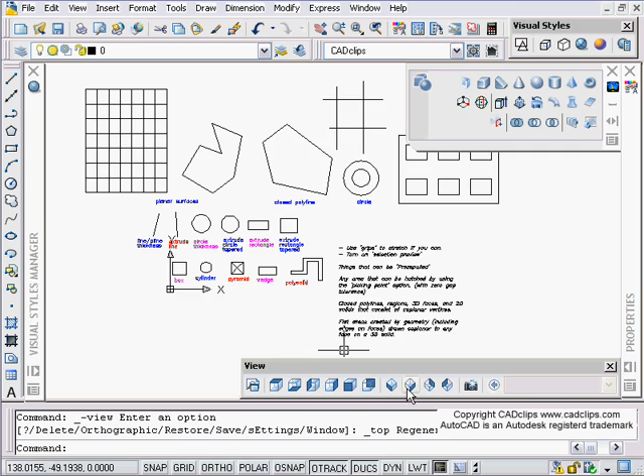I'm going to go to a diagonal isometric view. I've got some basic primitive shapes in here that I've used these tools to create. From my previous lesson, I've extruded a rectangle and extruded another rectangle, and I should have tapered that. You can taper that circle, given a thickness, and just some samples of when we go to use our press pull. Don't get it mixed up with extrude - similar but not quite the same, the press pull tool.

And we've got a new object here, some planar surfaces that we're going to create, and this is a polyline that we're going to turn into a planar surface.

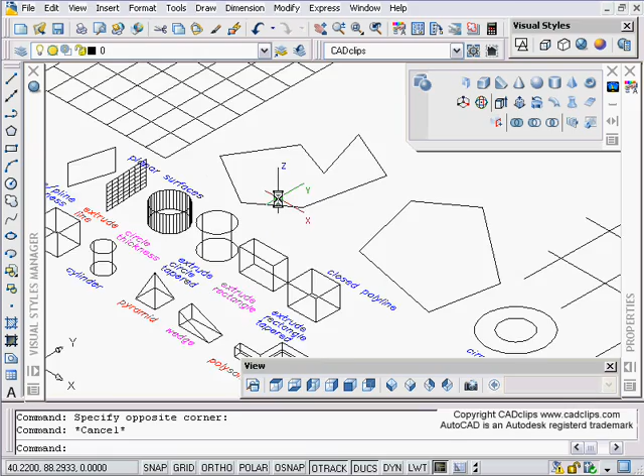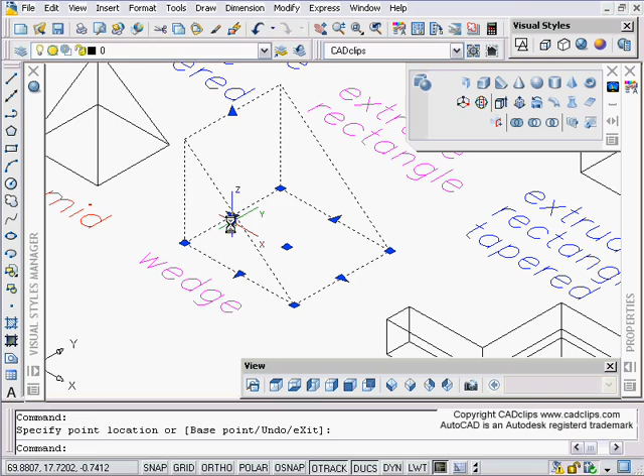So I'm just going to take a look at my notes here. First of all, use grips to stretch if you can. What I'm talking about here is we have some primitive objects over here. As long as we don't press pull them or extrude them, we can use our grips to stretch the shapes of these quite easily in 2D or 3D. So I can go back while this is still a wedge, and I can click on here and do all kinds of neat stuff with whatever is available with that particular primitive object.

Okay, or even something that's been extruded - this has been extruded. Grip on here and you can stretch this stuff around. We have different shapes, we have a polysolid, and we can do different things with a polysolid.

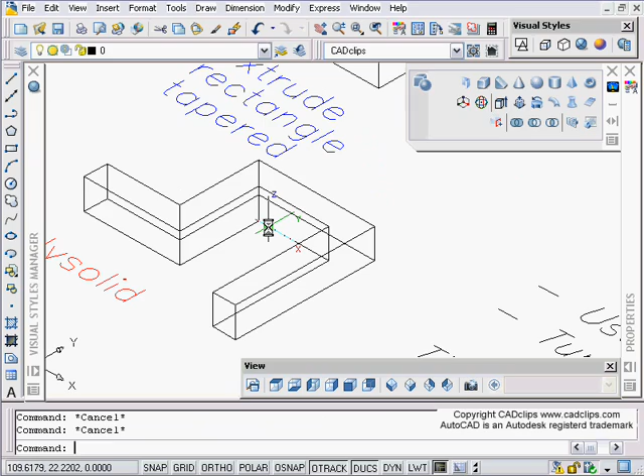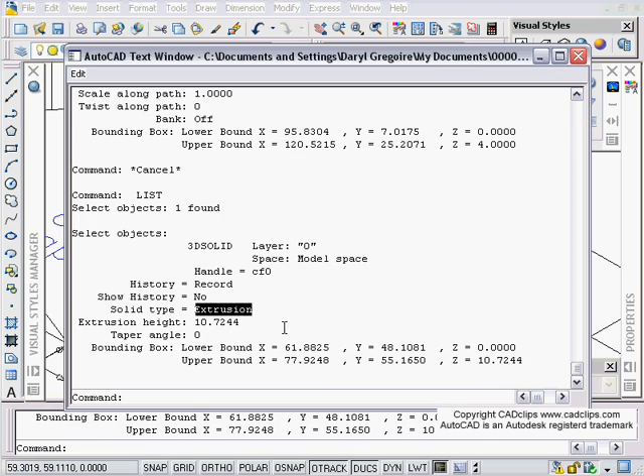Once we go in and use our press pull, you'll notice that if I list this, it lists as a 3D solid. If I list this, it's a 3D solid, and it's called a wedge. We saw this in the previous one - 3D solid, and it's a sweep. Just take note of that. If I list this, it's a 3D solid and it's just an extrusion. We're going to see something else in a minute. Again, we list this, it's a pyramid, and it is a 3D solid.

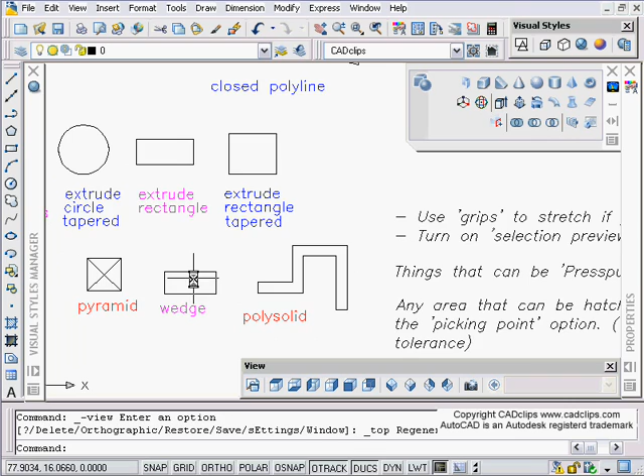So now when we go to do our press pull, first thing is use the grips as indicated, as much as you can before you go in and start press pulling, because once you press pull, you'll lose the control and the grips of that primitive object.

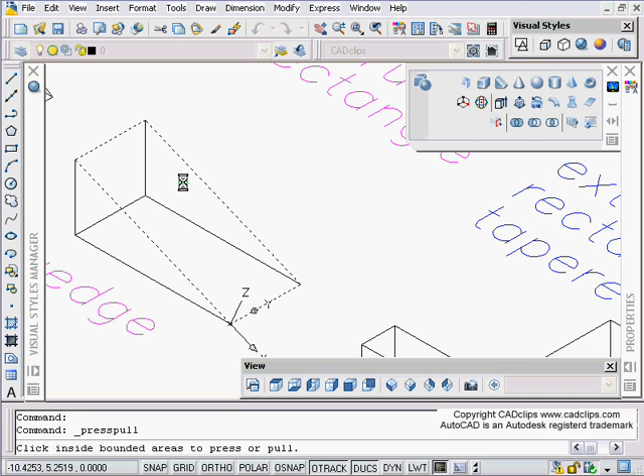Turn on selection preview when you're doing your press pull. So when you do your press pull, you'll notice that if you go inside here and start your command, you're going to hover over these edges. If you don't have selection preview turned on in your options under selection, then these edges won't preview, and sometimes you might have to swivel around with the shift middle mouse button to get that other side.

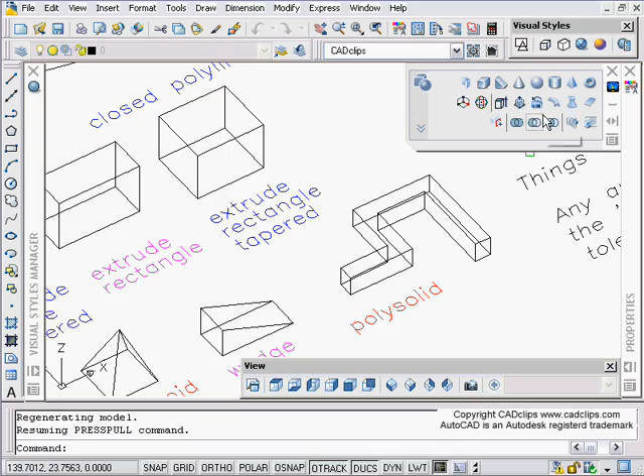If you can't get the side you want, shift middle mouse button will let you swivel around and grab the sides you want. I'm still in the middle of my press pull command - I started the command, and then shift middle mouse button allows me to transparently move around my object and zoom in and out with the wheel while still remaining in that command.

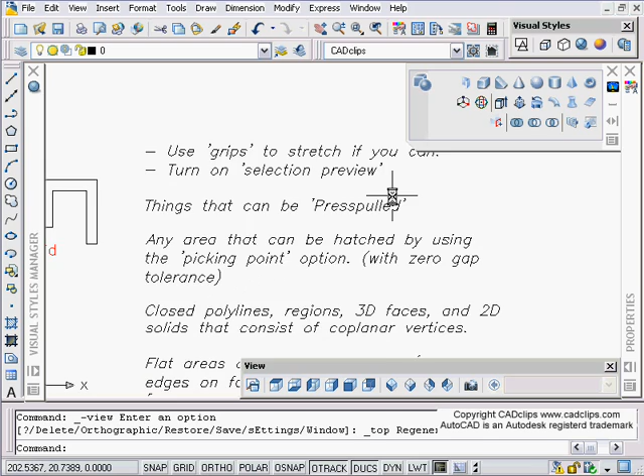So that's just a couple of notes before we get started. Turn on selection preview in your options. Things that can be press pulled - faces and stuff. Any area or flat area, it has to be a flat area that can be hatched by using the pick point option with the 0 gap tolerance, can be press pulled.

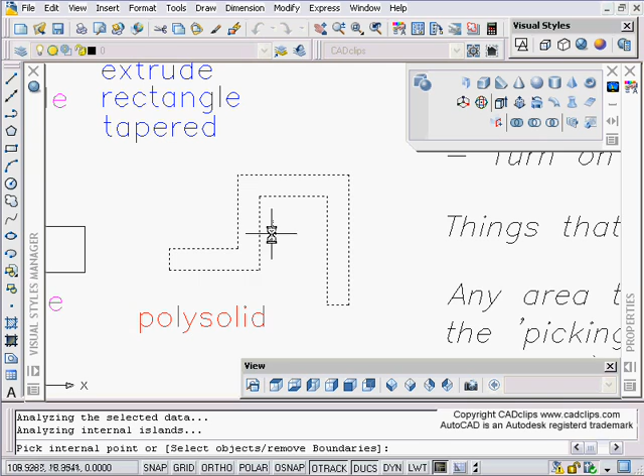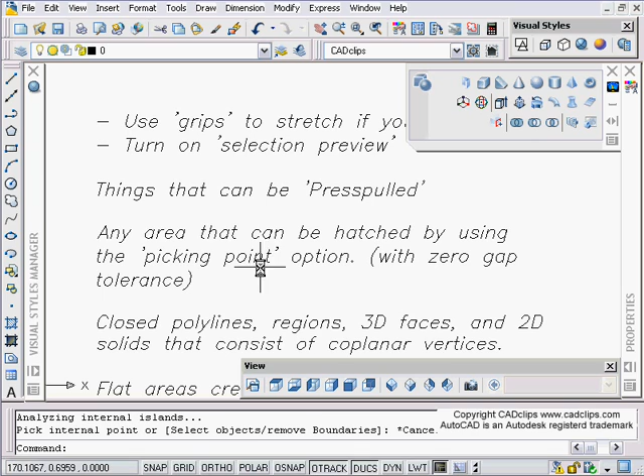So if you can hatch it using the pick point option - when you go in and hatch, I can type in add pick point, and if I can pick a point and it recognizes that, then these can be press pulled. So one of the similarities is if you can hatch it using the pick point option logic, then you can also press pull it.

The other thing you can press pull are just closed polylines. We've got some objects over here, some polylines and circles and stuff, and just basic rectangles. You can also press pull those.

But it has to be a closed polyline, which is if we do our rectangle command, that is a closed polygon. Circles can also be press pulled, more or less like an extrusion.

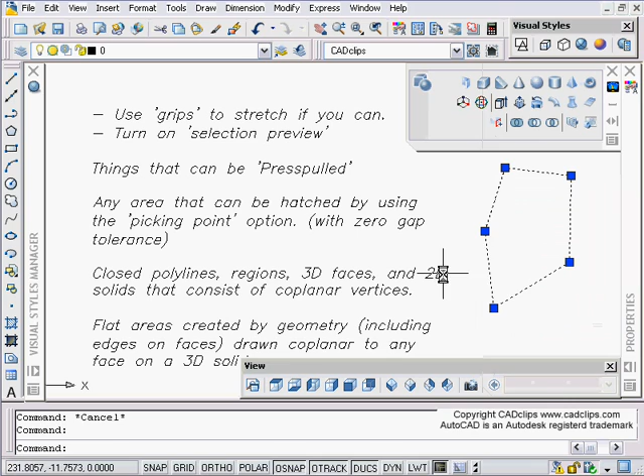If you have a polyline that's not closed, if you work your way around instead of saying close, you just pick the endpoint and hit escape, that is not a closed polyline. You have to click on that, go to the properties, and go down to where it says closed, and say yes. Now it's a closed polygon, and you can go in and press pull that object up to where you want.

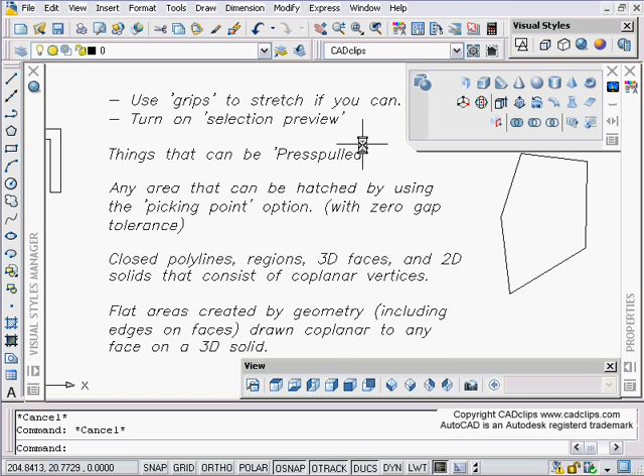We'll see that closed polylines, regions, 3D faces, 2D solids that consist of coplanar vertices - all things that can be press pulled. We're talking about things that can be press pulled: flat areas created by regular 2D geometry like lines, arcs, and circles, or geometry that's drawn on the edge of a 3D solid. We're going to see all of that right here.

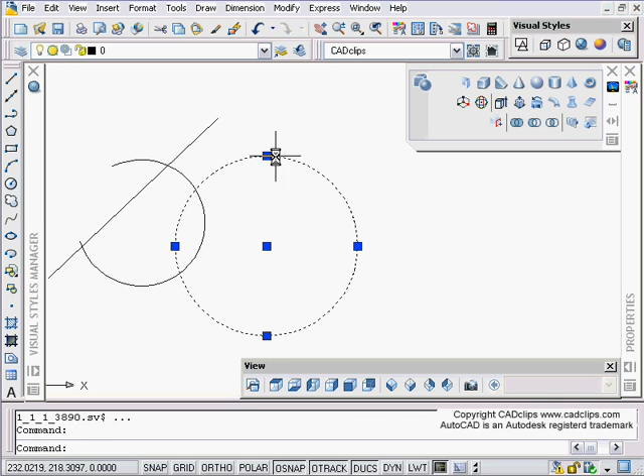Let's just start up here. We can also use a block too. Over here I've just got a circle, got an arc, and I've got a line. I'm going to go look at that in my 3D view, maybe change over to be my cool conceptual view here. Now I'm going to use my press pull, and I'm going to hover over that middle part, and I can press pull that up.

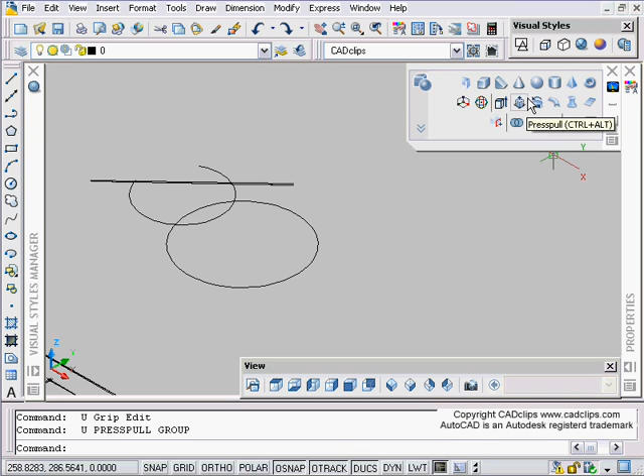Once I do it, I click on it. I can click my grips, I can move it around, have a look. I'm going to undo that back. Then I can say press pull - maybe I'm going to press pull this part up, or maybe only this part up.

Shift middle mouse button. Same thing over here, I've just got some rectangles, that's all these are, rectangles. I can say press pull, and I can hover over here, press pull that up. Is that cool or what? Could have used this a long time ago.

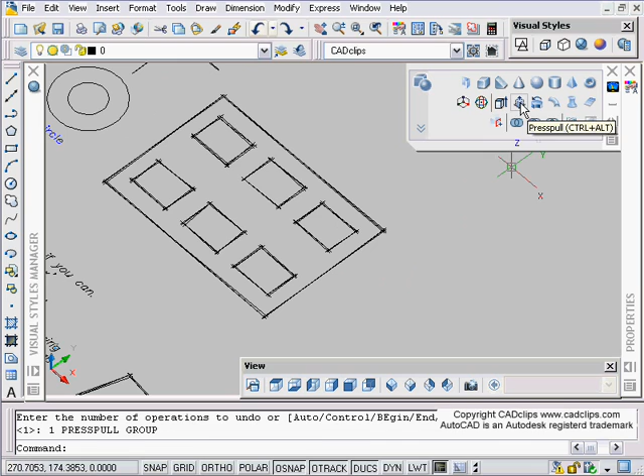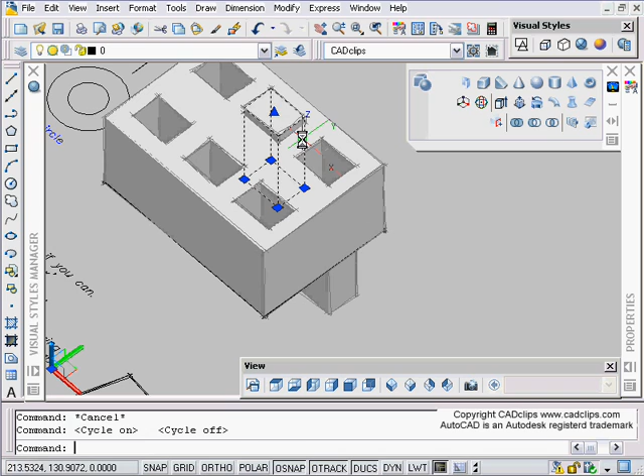Or I can say press pull this guy up, or press pull this guy down. I can still go back, press pull, grab all of these, bring them up, and then I can grab that one guy that was in here.

Shift space middle mouse to toggle through, grab my grips, pull that one up - all starting from just regular polylines. Shift middle mouse button, hover over here. We've got a couple of circles. Press pull, grab the middle one, press pull, grab the outer one. That's just using regular 2D line geometry.

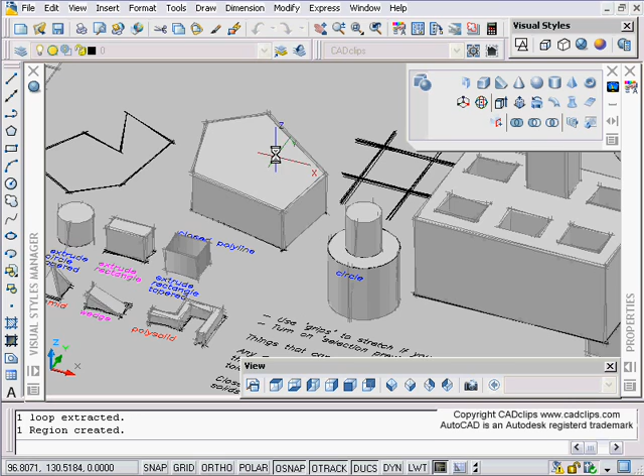Over here I've got a closed polyline. Press pull, click on here, bring it up. Now that I have that, I can say line - I can draw a line, and I have to make sure I snap to those endpoints because it has to be on that surface, which is where our dynamic UCS comes in very handy. Now I can press pull that up.

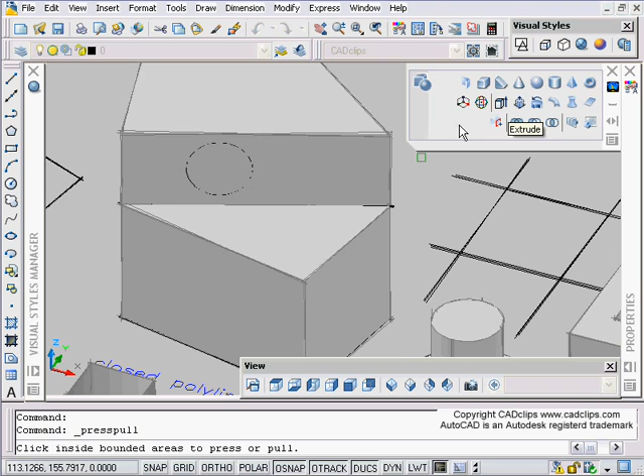Using my dynamic UCS, I can hover over here and draw a circle on here, then I can press pull, grab that, pull that out. Now I can draw another circle on maybe here - am I pushing it too far? Press pull, grab that little guy, push it in, just like that. Shift middle mouse button.

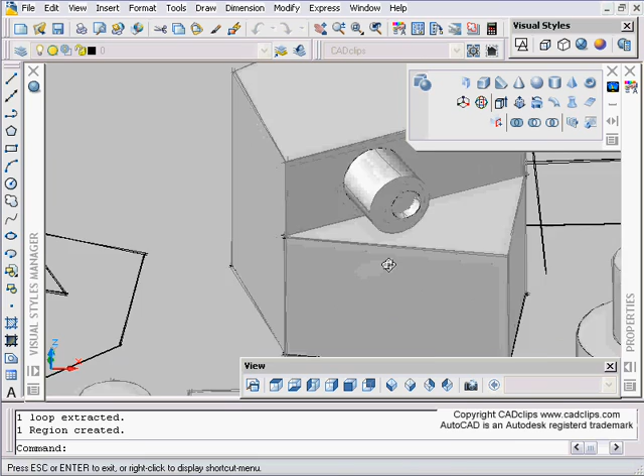Anytime you want to go ahead, you can start to draw a line on a surface - regular line, but it has to be on the surface. Now that one I don't think went on the surface. Let's just move along here.

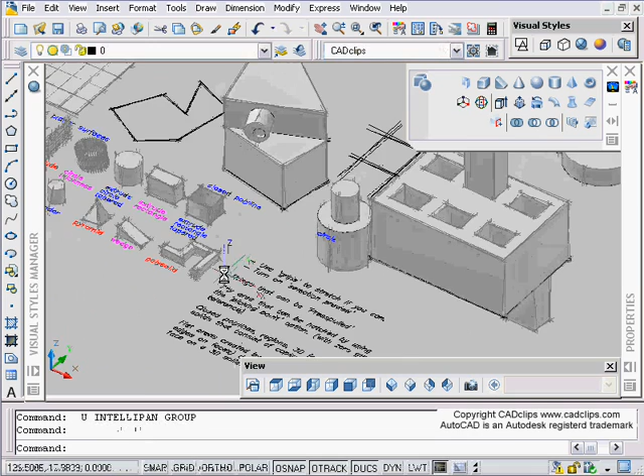Here we've got a polysolid, no problem, go in, push, pull, hover over it, do what we want. We've got a wedge over here. Maybe we're going to draw a line, making sure we hover over this to get our dynamic UCS working.

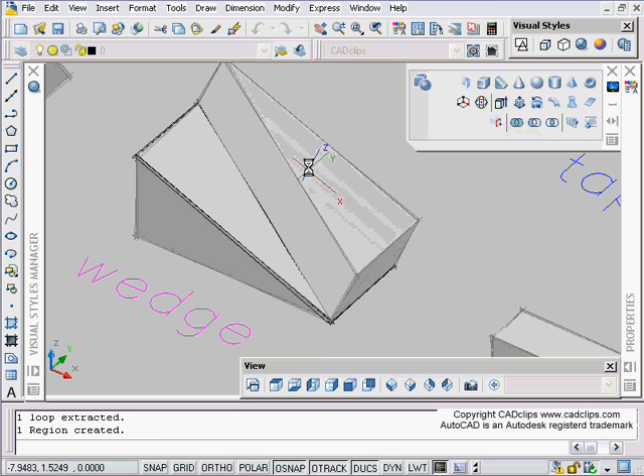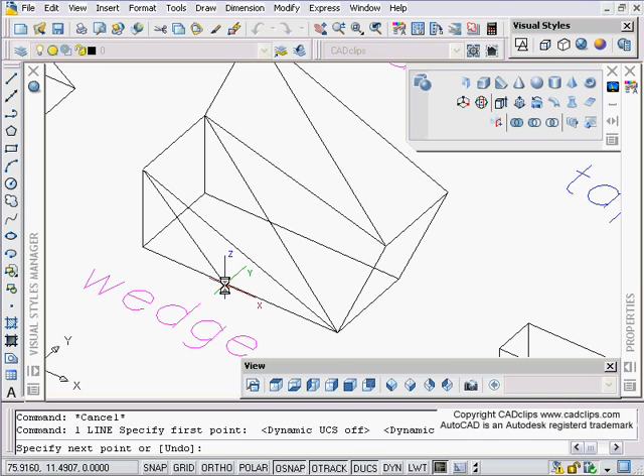Now I can press pull, grab that surface, bring it up. Draw another line from there, notice the surface is hovering. When I go to draw that line, I type L. Notice that I'm picking the surface because my DUCS, my dynamic UCS is off, I can't draw on that surface. If it is on, I can draw on that surface, and then I pick there to maybe that midpoint.

Press, pull, click on this little guy, bring it out. It's really endless, the degree to which you can play with this stuff. Draw on any surface and press, pull the object up. Cylinder, same thing, as a cylinder it's fine.

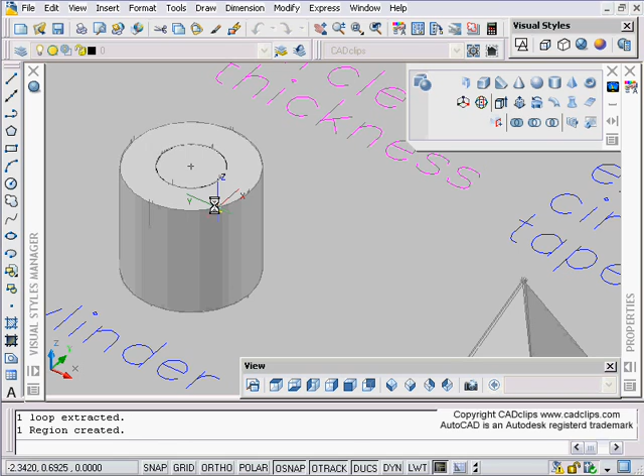If you want to poke a hole in there, maybe we'll go in and draw a circle, then hover over here to get that surface, draw our circle, click on there, do a press pull, click in that little middle guy, take my snap off with my F3, drag down, shift middle mouse, I've added that in there. Unlimited as to how you're going to do that.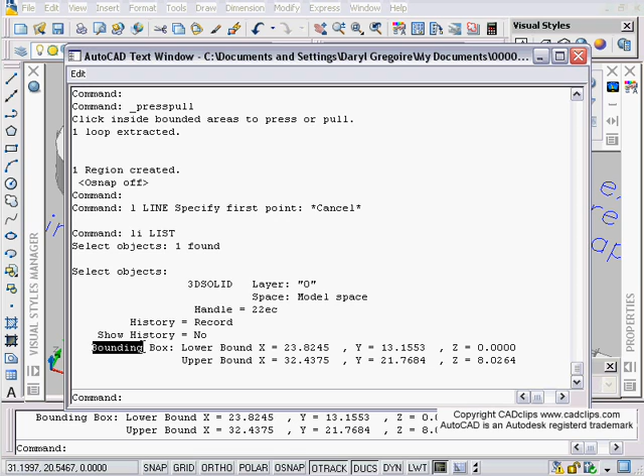Now the difference is if I list this now, it's a 3D solid and it has no, it just says bounding box, it doesn't say it's a cylinder anymore. This still lists as a pyramid, see solid type, but if I scroll back, this one, the previous one, doesn't show that information because it's a hybrid type object.

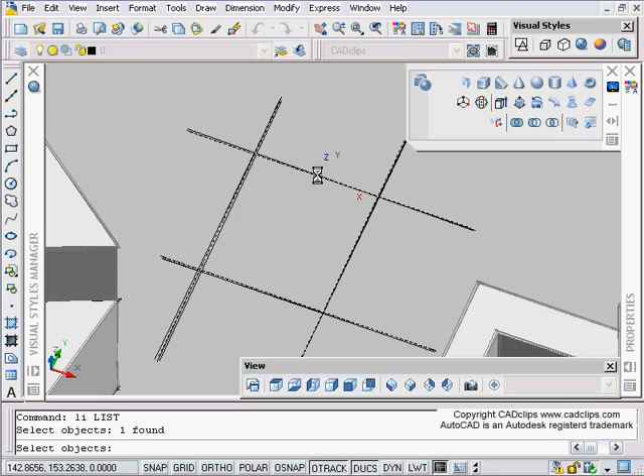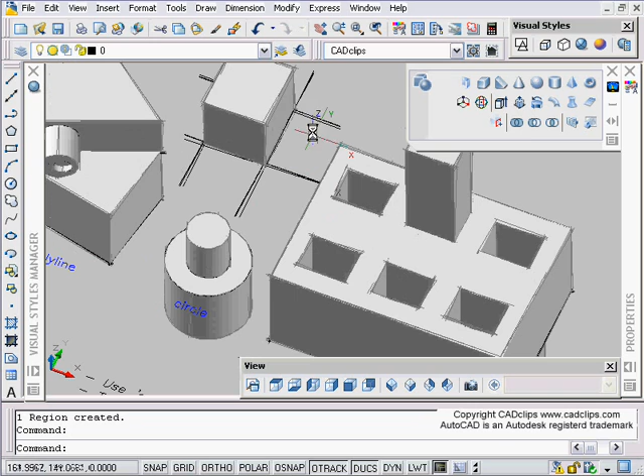Now this is a block. If I list this, this is a block, and the block name is just block 1, and it's made of lines, but guess what? Press pull, I can hover over that, and grab that. So even 2D geometry that is part of a block can be press-pulled out.

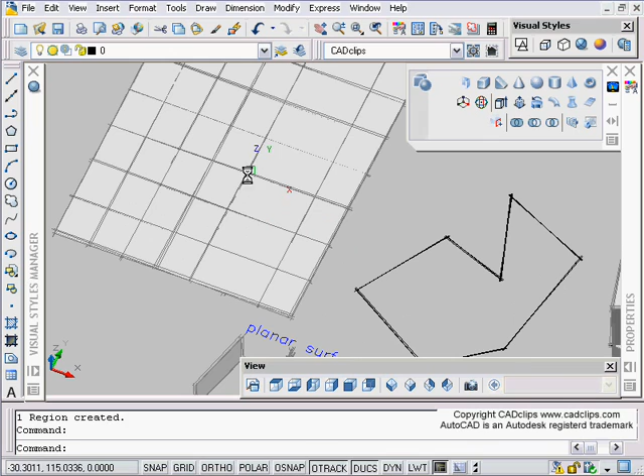So blocks, 2D geometry drawn on top of 3D geometry, closed polylines, cylinders. This over here is a planar surface.

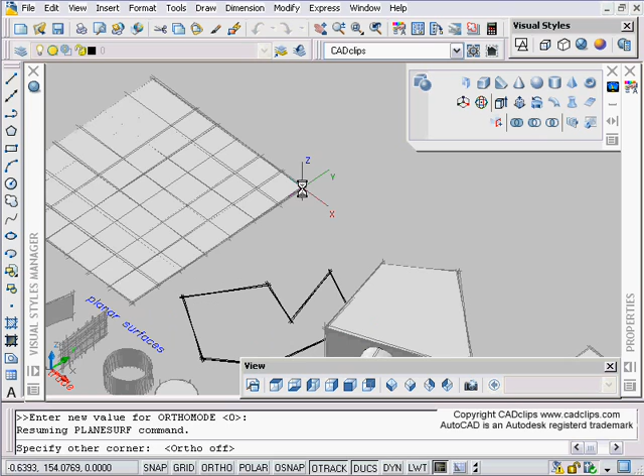Let's erase that, draw a new planar surface we haven't done. When you draw a planar surface like this, I can use my shift middle mouse button here. Make sure that your ortho is off. If you turn F8, if you turn ortho on, you'll notice it does weird things. So there's a tip for you.

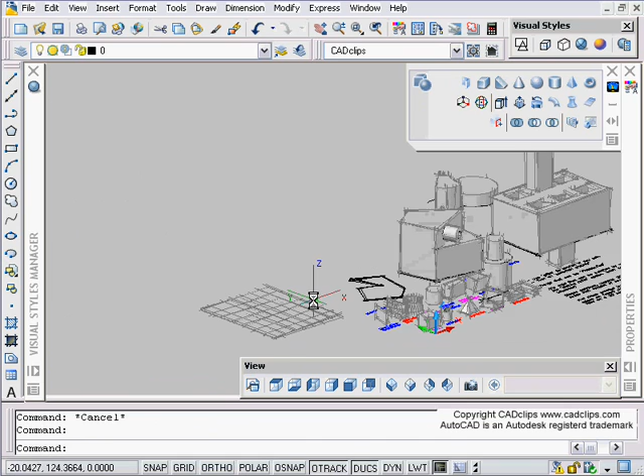Planar surface, when you click on that, if you try to draw right now, I'm moving around, I don't see anything. If you take your F8, your ortho off, then your planar surface will work. Now that we have that planar surface drawn over here, I can go down and use my press-pull, hover over it, bring it up.

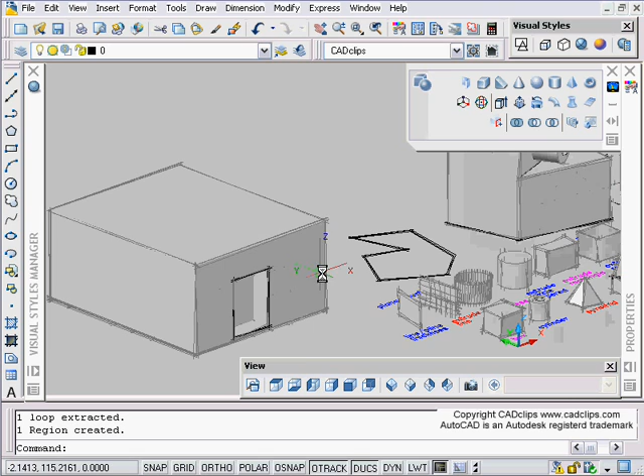Very, very quickly we can start to draw some objects on there where we can very quickly create some shapes of whatever we want. We can fillet and round these edges and stuff, all kinds of neat things with our solids. We're just talking about the press-pull. So lots of items.

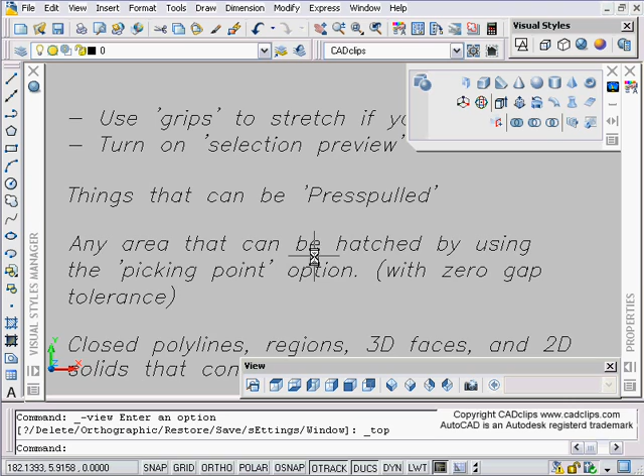So let's just have a look at our recap over here. Use your grips, turn on selection preview. Any area that can be hatched, it can be push-pulled. Make sure that it would have a zero gap tolerance. Closed polylines, regions, if you draw a region, which is really a flat 3D object.

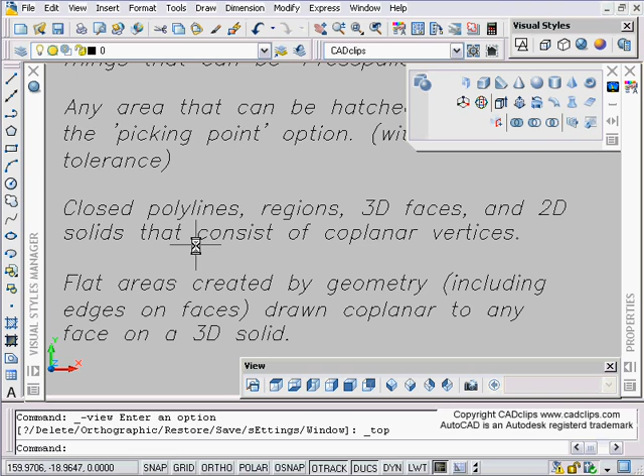3D faces, surfaces, planar surfaces, 2D solids that consist of planar, so coplanar meaning on the same plane. Any flat area created by geometry, including 2D geometry drawn on top of 3D, so we're using our DUCS. Remember to take ortho off when you draw a planar surface.

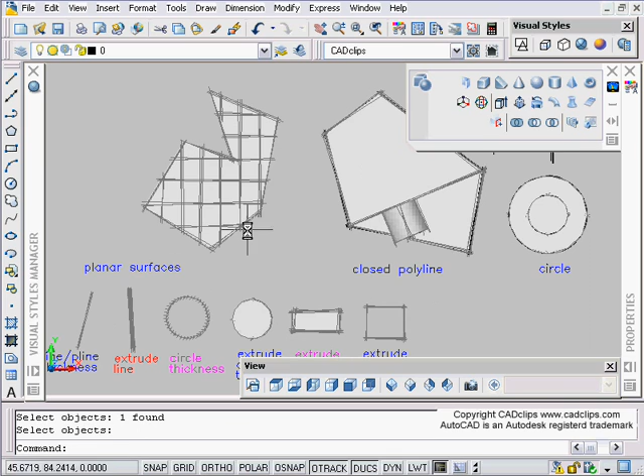And then we can take a polyline and convert that to a planar surface by starting our planar surface, hit O for object, pick on here and enter, and that turns it into a planar surface. And then we can go down to here from that polyline and we can push-pull that up.

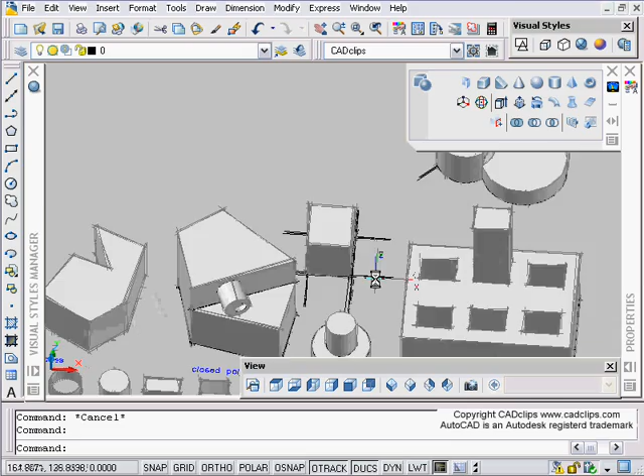We can also just push-pull a regular old polyline. We can push-pull an area within a block because that would be hatchable. Remember when we are hatching, if you can hatch it with a pick point, you can push-pull it. So there's some great tips, and I'm sure you can experiment with that and have fun with the new push-pull, press-pull command in our exciting new AutoCAD 2007 3D tools.